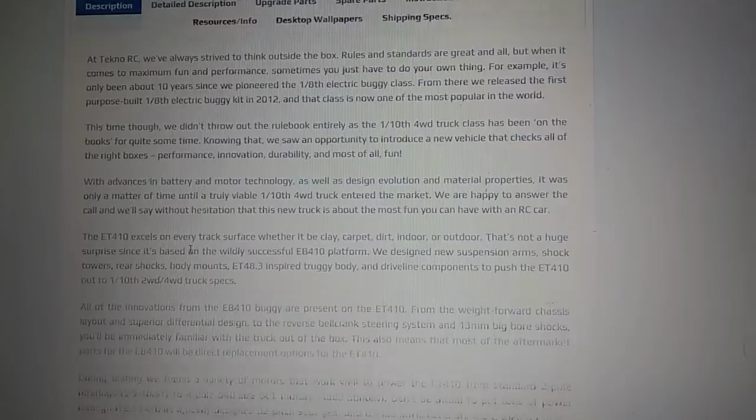I meant to do this a couple of days ago, but Tekno is releasing a 10 scale Truggy, the ET410. The retail MSRP is going to be $429.99, and basically it is a 10 scale Truggy you guys see there. They've got specifications and stuff for it down here.

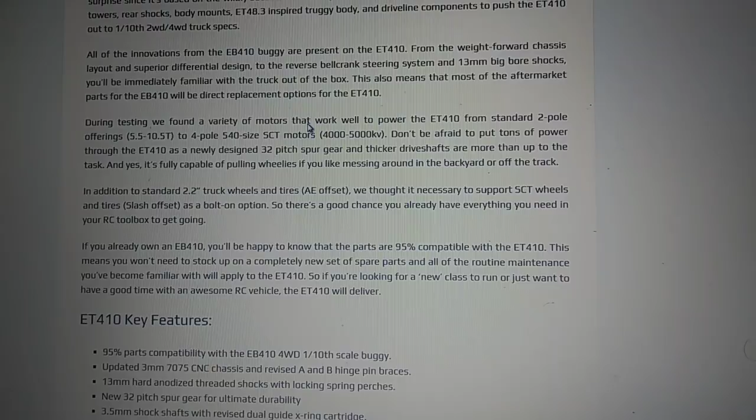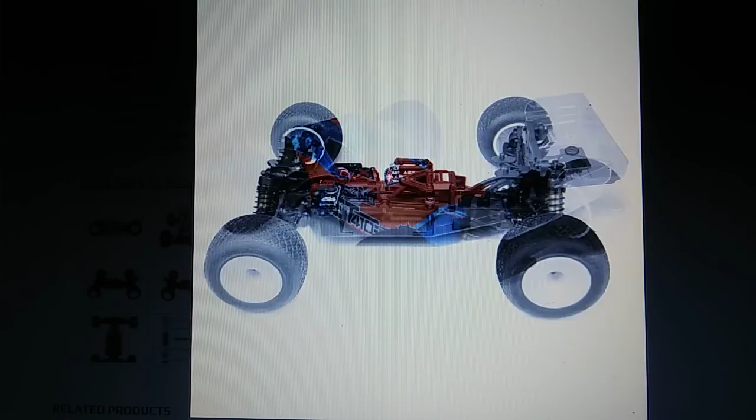The only thing that's keeping me from thinking about this truck is the battery component. I think it uses a shorty pack, and that will keep me from getting it because that limits me to the batteries I can use in it.

But you see there's plenty of room for hop ups, you can get metal or aluminum chassis braces here. This thing is pretty much well designed and laid out. So maybe this will make Hobao take a second look at the Hyper T and do an update to it, which would be good. This does look really well done.

I'm just concerned about this battery tray, but it does look to be a little bit longer there. Of course you're going to get an aluminum chassis with this. Man, look how thick these A-arms are, so you're not going to really break those, but you could. There's another look, I'm looking at that between those two. It might fit a standard LiPo in there, I don't know, that's going to be interesting.

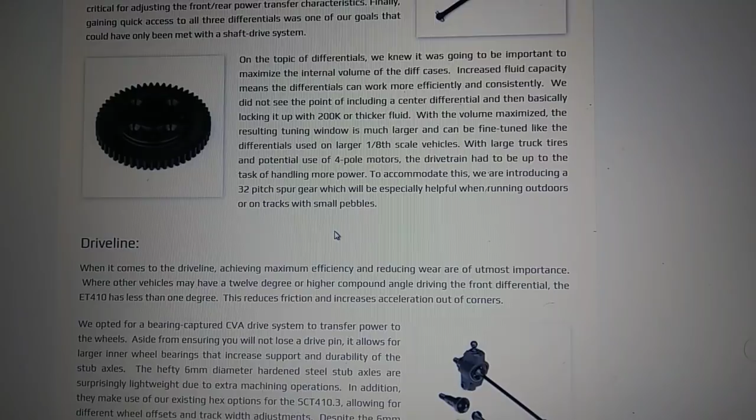I didn't see too much stuff in the specifications for this, so let's see if we can find something real quick. Detailed description, drive shafts look to be pretty thick on there. Differentials locking up with a 200K differential, 4-pole motors. They're doing 32 pitch gears here where the Hyper T is mod 1, so there's a difference there.

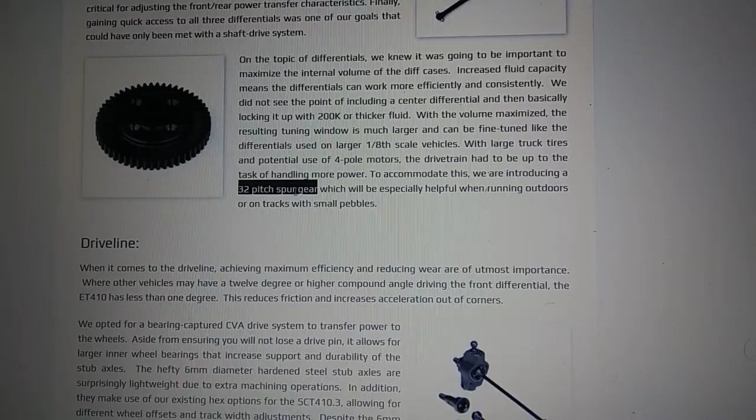Doesn't say how many teeth are on here. Drive line uses CVAs on it, which is good. The Hyper T uses those on the front and dog bones on the rear. Reverse bell crank system available, that's good too.

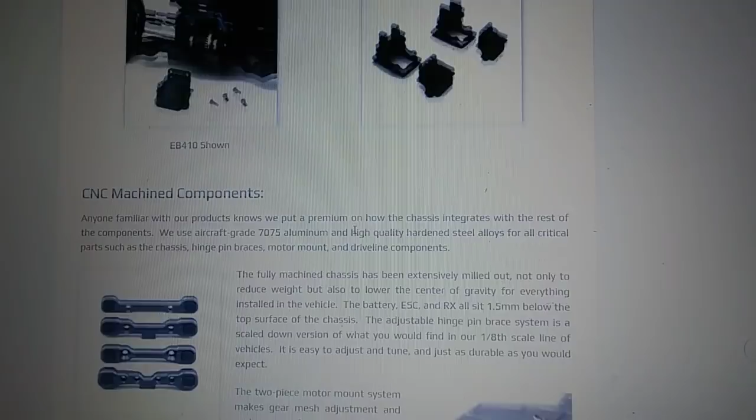One of the things it should have is easy access diff, which the Hyper T doesn't — to get to that diff you really got to take a lot of stuff apart. But it is an older design. The Hyper T's been out for, shoot, probably over 10 years, or right around 10 years.

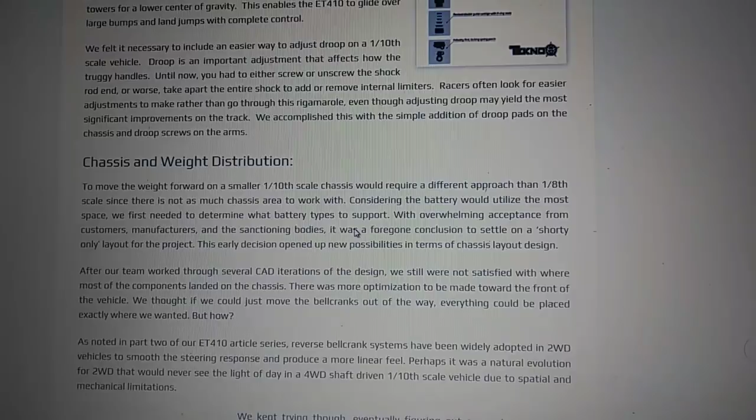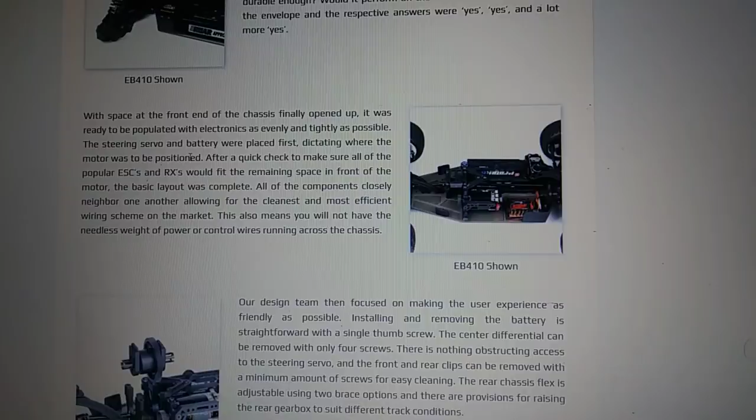CNC machined components, shocks, big bore shocks there, 13mm shock bodies, which is good. Chassis weight and distribution — I think that is a shorty pack that's in there. And that does steer me away from this because it keeps the crowd, as far as myself, from getting this, because now I got to buy special batteries for it.

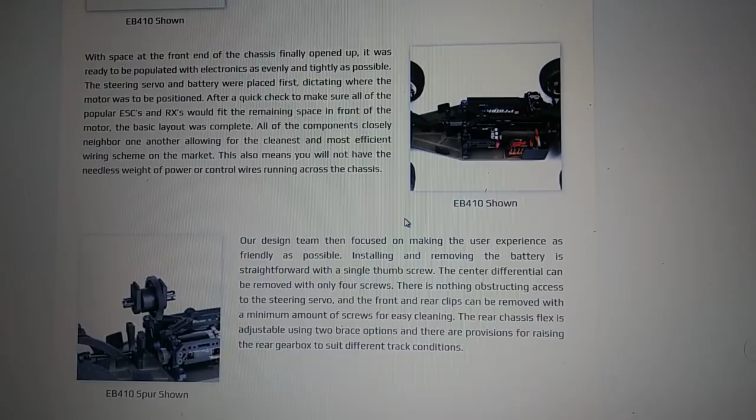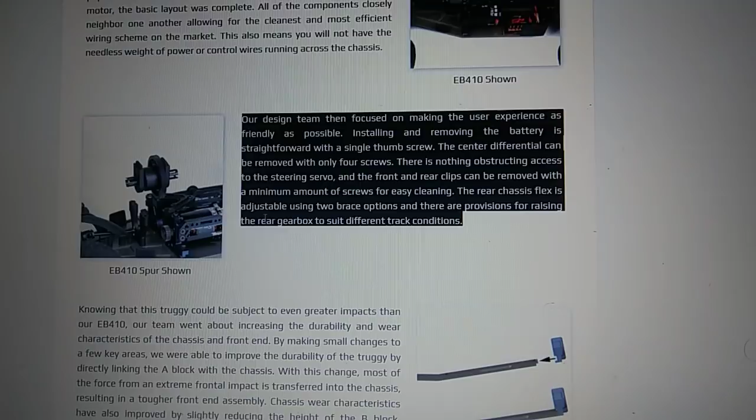When I had my T5M, I didn't have it too long because I just didn't like those shorty packs and all that. I wanted to run 3S on it to see how it performed. I think when companies do this, they limit themselves to racers only, who will buy if they start a class on it. But it's the bashers — I know people will argue me down — but it is the bashers and the people that generally run cars that kind of run the hobby and keep it going. The racers just kind of get us enthused about particular companies.

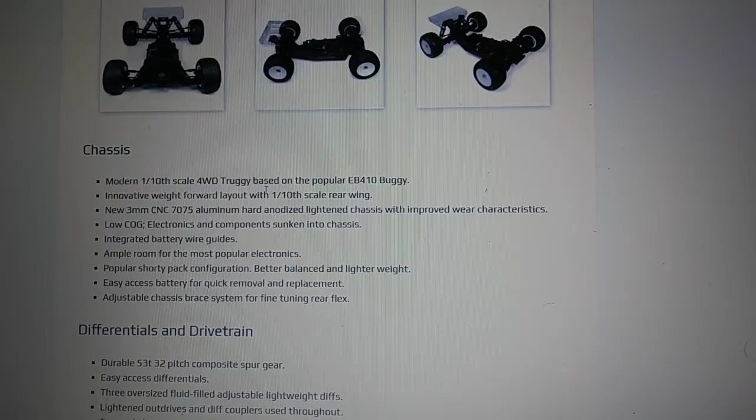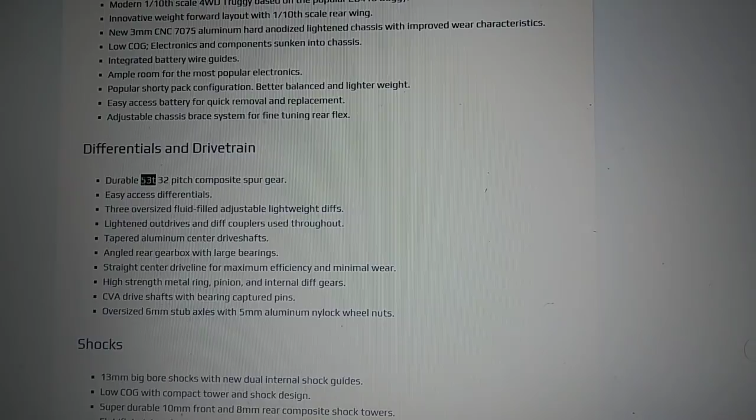But Traxxas doesn't race, Arrma doesn't race, and they are the top 2 RC car companies out there. Then you got a battle with Associated and Losi for 3rd place. Here it is, 53 tooth, 32 pitch spur gear there. So I'm not sure if I'll get this at all, especially for the price point, but I did want to show this to you guys.

They do recommend particular motor sizes, 540 — I'd get a 550 in there. 15 to 19 tooth, yep, 2S shorty pack. There it is, shorty. I won't be getting you, shorty. But I did want to introduce this to you guys, show this to you if you aren't familiar with Tekno. They do have other stuff out there as well.

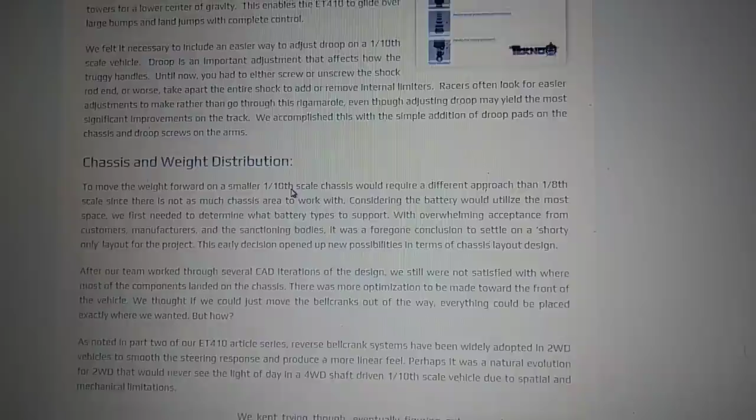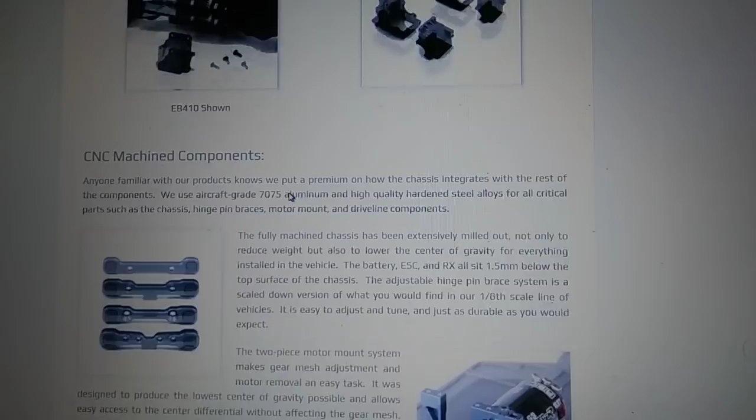I was really hoping that this did not use a shorty pack, but it does. So I don't know, we'll see, we'll see, that's the best way I can put it. They don't look like 32 pitch gears to me, it looks like 48, but it is 32. Two-piece motor system — sorry guys, I'm just kind of reading and looking through some of this stuff.

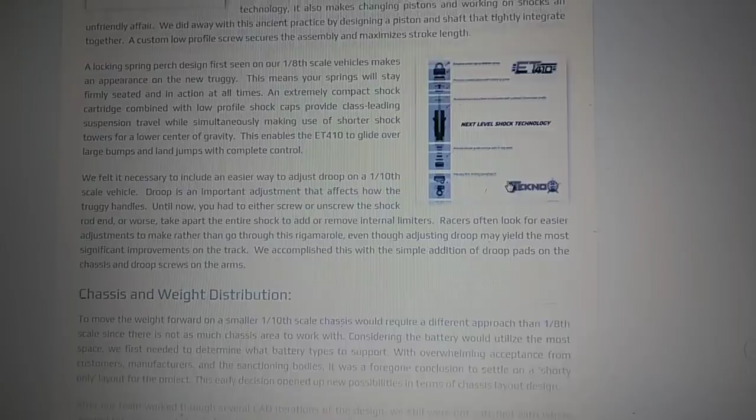I'll try to put a link out in the description for it as well. You guys can see this is showing the ET410, but you can also do Google searches on this ET410 and find more information, because it's blowing up in the forums as far as the racing forums go.